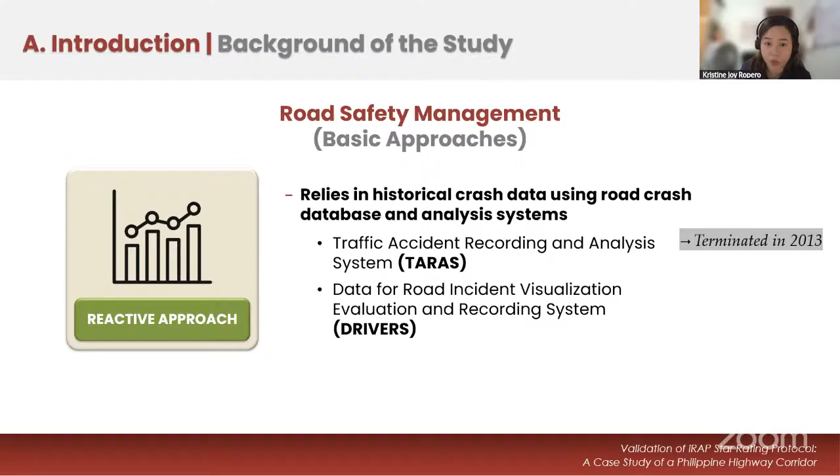Another software or innovation was introduced: the Data for Road Incident Visualization, Evaluation, and Recording System, or DRIVERS. This one was developed by the DOTR together with the World Bank. However, it is not yet operational due to lack of funding. So the problem is that there is currently no operational crash data system being used in the country.

Another approach is the proactive approach, which relies on or focuses on road infrastructure attributes to predict and prevent crashes. An example of this is the International Road Assessment Program, or IRAP. IRAP is a global nonprofit organization which aims to reduce road trauma by conducting road safety assessments and improving road infrastructure. Basically, IRAP uses design features to predict the likelihood and severity of crashes or injuries, and it assigns star ratings from 1 to 5, with 5 being the safest roads.

To understand the concept of star ratings, we can compare it with hotel star ratings. For example, a 5-star hotel rating indicates a higher level of quality of service, such as more luxurious accommodations, larger rooms, and a higher standard of hospitality. Similarly, for IRAP star ratings, the higher the star rating means a safer road and therefore lower crash risks.

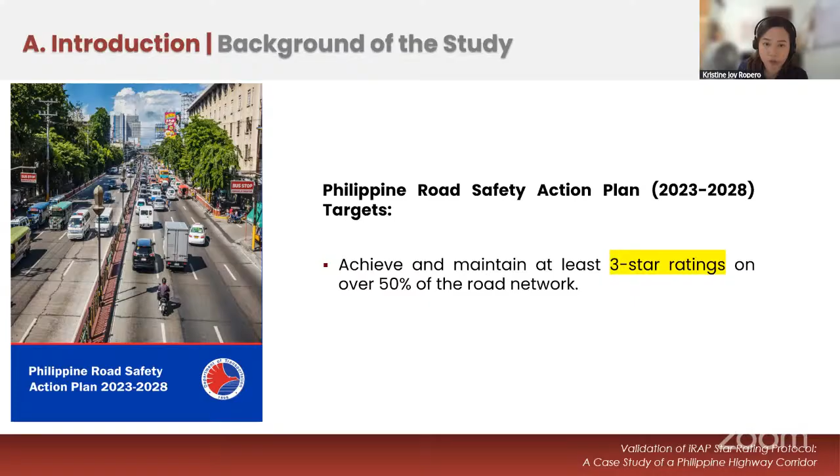Under the Philippine Road Safety Action Plan for 2023 to 2028, the IRAP star ratings are already in place with the goal of achieving and maintaining 3-star ratings on over 50% of the total road network. Now, since we are adopting an international standard, it is valid to ask how well the star rating correlates to actual safety outcomes.

The objective of the study is to demonstrate the validity of the IRAP star rating concept for application in Philippine national roads by comparing star ratings with actual crash data. The star ratings in this study will focus only on the vehicle occupant star ratings.

For the crash data, we will be using the PNP blotter system. But this system, although it contains crash data, is in spreadsheet form, containing information regarding the time, date, location, longitude, and so on. Information about the crash is located in narrative format, so in the e-blotter, everything that happened in the crash is narrated, and from there you can see the crash type and the vehicles involved.

So the study area focuses on the Cagayan de Oro-Davao-General Santos Highway with a total length of 428.20 kilometers.

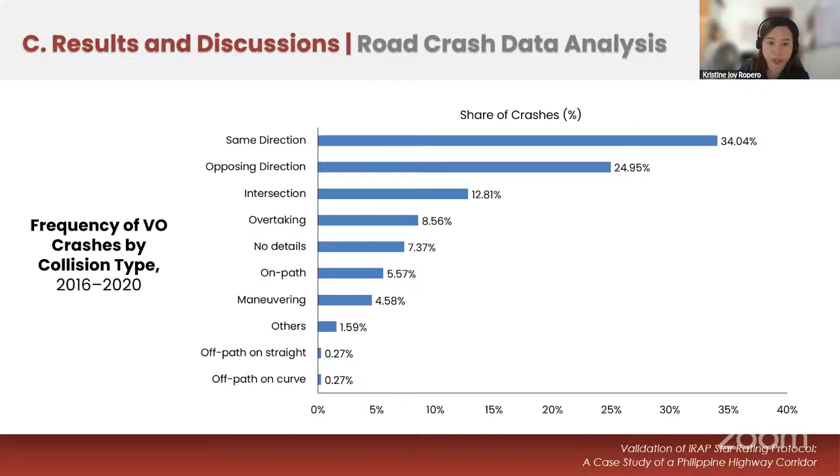And then I used the negative binomial generalized linear model to evaluate the statistical significance of significant changes in crash rates, particularly comparing the 2-star versus the 1-star and the 3-star versus the 1-star road segments.

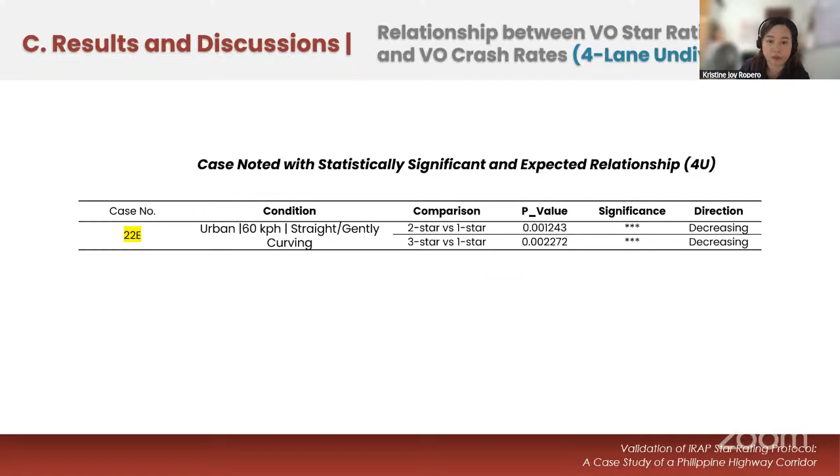So if you'll observe, the IRAP model assumption is that overtaking only happens on the same lane, same direction, but is lessened when it comes to multi-lane roads.

Here in our local driving behavior in the Philippines, and if you recall the slides I showed regarding our dominant crash types, we have overtaking and opposing direction crashes present. So therefore, our local driving behavior differs from the IRAP model assumption.

And then to verify this claim, I utilized the IRAP demonstration tool to check the same road section, the same configuration, 4 lanes, but comparing segments without a median versus segments with a physical median.

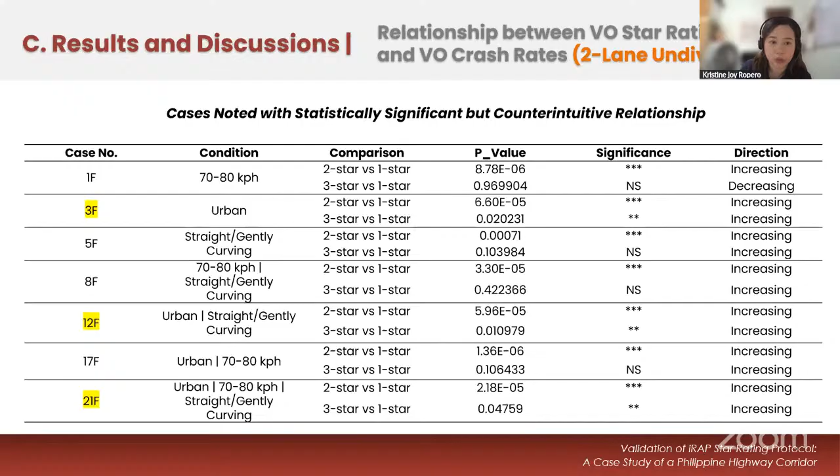And then upon testing the statistical significance, we still identified some counterintuitive cases, but fewer; however, we identified more cases following the expected relationship, which is the decreasing trend.

It is also important to note that when we break it down by speed, we again see a stronger alignment of star ratings and crash outcomes on 2-lane undivided roads, particularly for road segments with lower speed limits, at 60 kph.

So for the overall applicability of IRAP star ratings, although we noted contradictory results in the data analysis, the study identifies opportunities for improvement and therefore does not diminish the value of the IRAP star rating methodology.

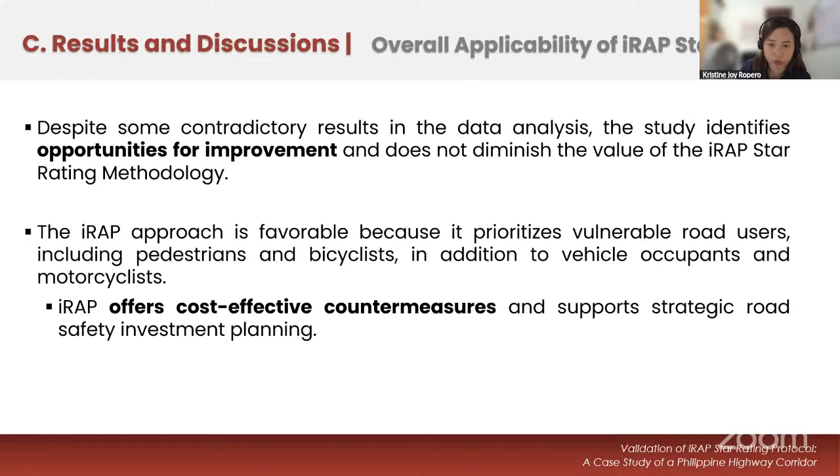We still recognize that the IRAP approach is still favorable, especially for countries like us that don't have a crash database system. So IRAP offers cost-effective measures. That's what's great about IRAP—it has cost-effective countermeasures and supports strategic road safety investment planning.

For the recommendation of this study, star ratings on 4 lanes should be interpreted with caution and supplemented with additional safety analysis, and explore the development of a specific Philippine road safety assessment and integrated safety assessment approach.

Star rating assessment should complement, not replace, crash-based analysis. The combination of the two, proactive and reactive, can help us have a comprehensive understanding of road safety risks.

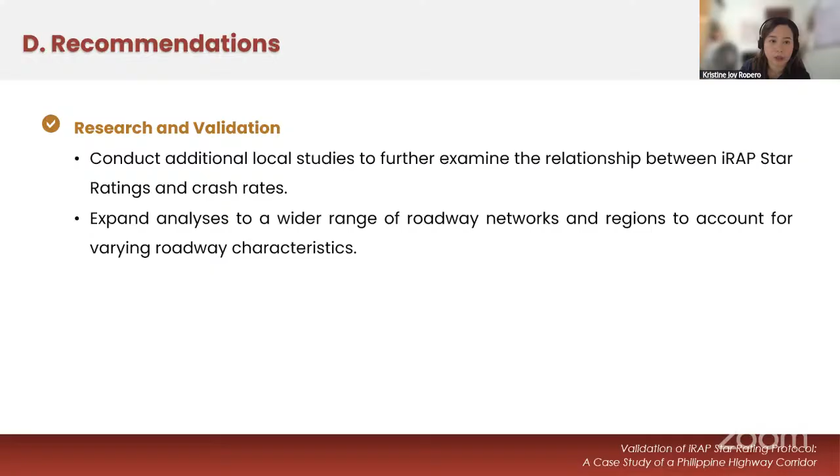Also, additional local studies should be conducted, because it can vary depending on the area. If there are further studies, it would be better so we can really see the relationship between IRAP star ratings and crash rates. These are the references used in the study.

So that ends my presentation.

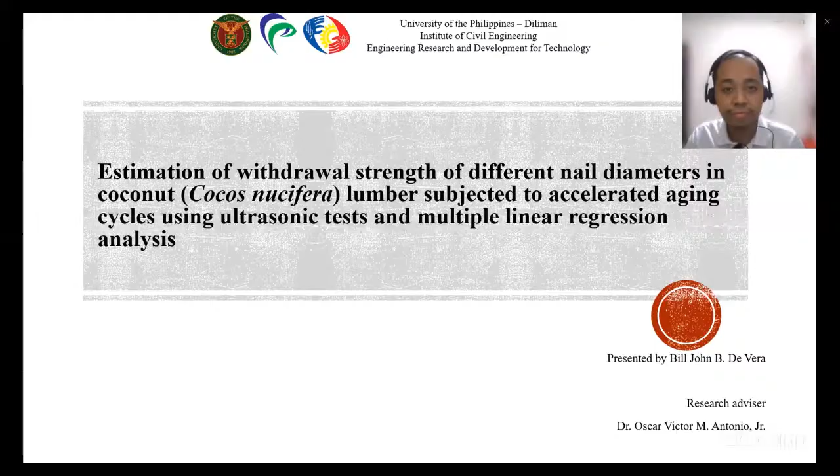To give everyone context for my study, people often live in non-engineered structures outside urban areas. These structures have little to no engineering intervention and are more vulnerable to natural hazards such as typhoons. In 2013, Typhoon Haiyan caused damage to several structures in the Philippines, and roof failure is the most common failure mode. For example, on hip roofs, pull-out or withdrawal failure is a typical failure mode.

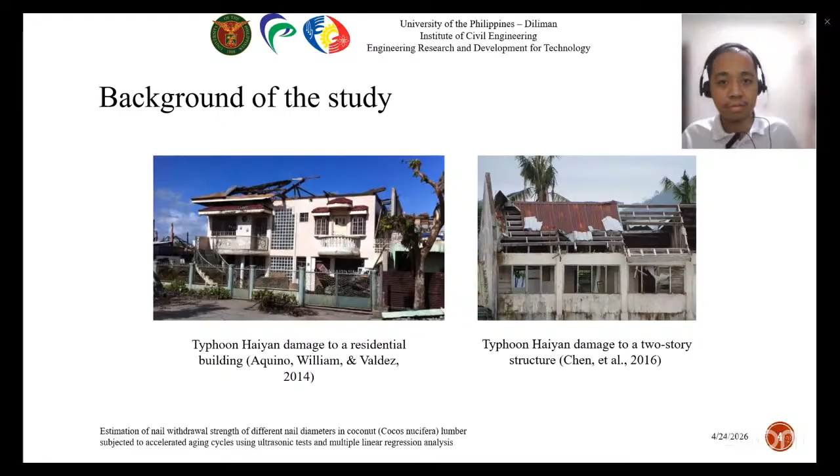Previous studies investigated the influence of different factors such as nail diameter, cracks, and rust on nail withdrawal strength in wood. However, these destructive tests damage the specimens and cannot be used once testing is performed. To date, there is also no study for estimation of nail withdrawal strength of different nail diameters in wood using ultrasonic tests, a non-destructive test.

To address this gap, this study primarily aims to develop an empirical model, that is, a regression model, for estimating nail withdrawal strength in coconut lumber with different nail diameters and ultrasonic test parameters, while accounting for the effects of accelerated aging.

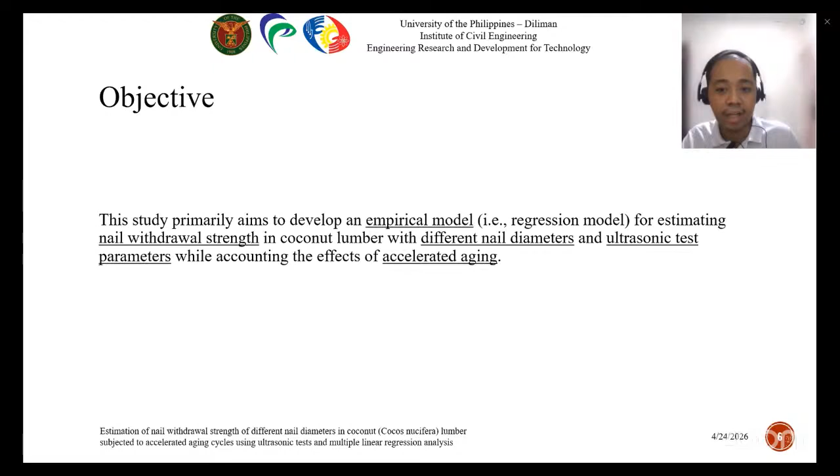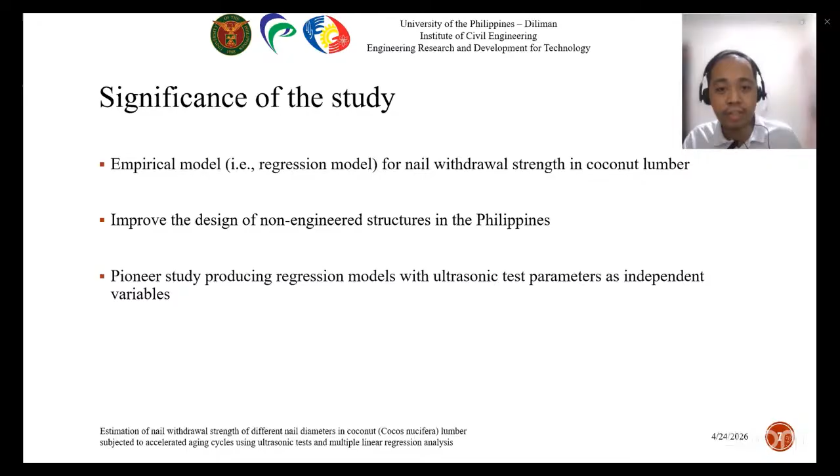If successful, the study will provide an empirical model for nail withdrawal strength in coconut lumber and improve the design of non-engineered structures in the Philippines. This study will also serve as a pioneer study producing regression models with ultrasonic test parameters as independent variables.

To achieve this, the study started from preparing the necessary wood and nail samples for experiment implementation. The prepared samples were subjected to different numbers of accelerated aging cycles. Ultrasonic and withdrawal tests were then implemented. The effects of different numbers of accelerated aging cycles on wood and nail samples were assessed. Finally, statistical and regression analyses were performed to determine the relationship between nail diameter, number of accelerated aging cycles, ultrasonic test parameters, wood density, and nail withdrawal strength.

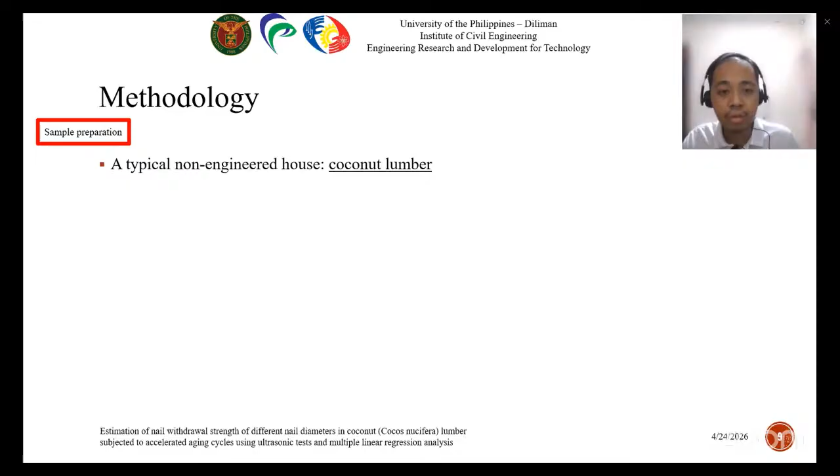A typical non-engineered house roof frame in areas affected by Typhoon Haiyan is made of coconut lumber. Coconut lumbers free of defects with approximately constant grain orientation were selected, and 30 mm by 40 mm by 150 mm wood samples were cut.

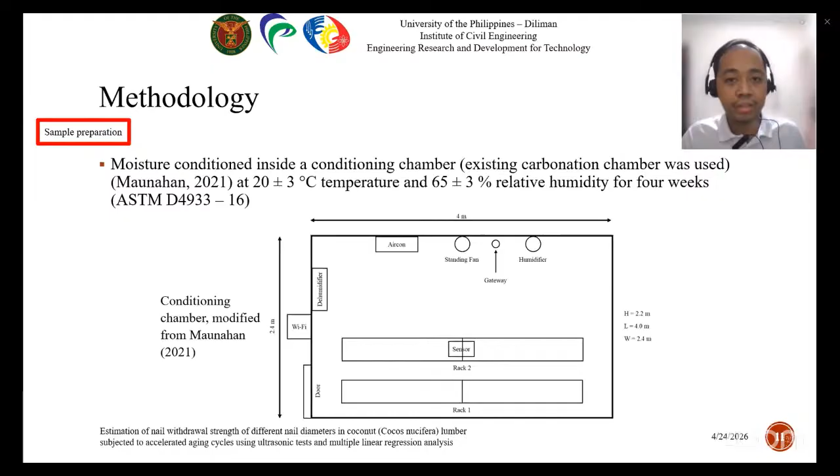To ensure consistency, the wood samples were moisture conditioned inside a conditioning chamber at 20 ± 3 degrees centigrade temperature and 65 ± 3% relative humidity for 4 weeks. These figures show the moisture conditioning of the samples.

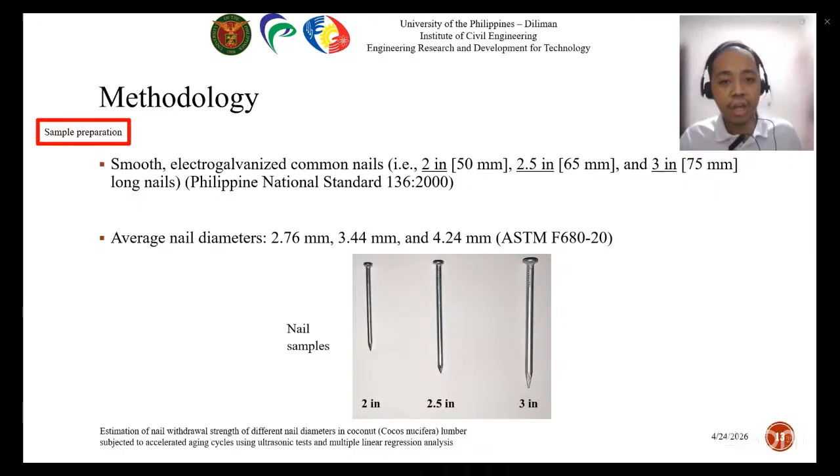3 types of smooth, electrogalvanized common nails, that is 2-inch or 50 mm, 2.5-inch or 65 mm, and 3-inch or 75 mm long nails, were used in this study. The average nail diameters were 2.76 mm, 3.44 mm, and 4.24 mm for 2-inch, 2.5-inch, and 3-inch long nails respectively.

Each nail was hammered at a right angle into the center of the 30 mm by 150 mm face of a wood sample. The nail was marked and embedded 40 mm into the wood sample. Wood samples that exhibited splitting were discarded.

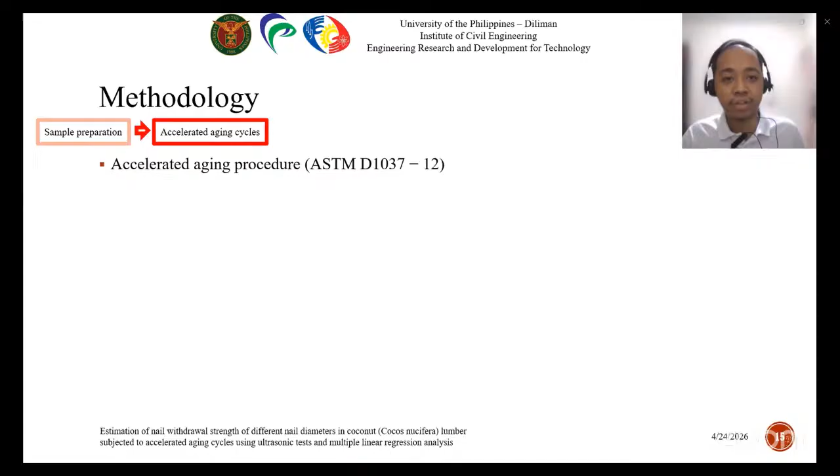Since it was not feasible to perform years of outdoor aging, an accelerated aging procedure was implemented to simulate environmental degradation effects on the samples. The procedure involves alternating steps of soaking, steaming, and oven drying.

To examine damage progression, 5 samples for each of the 3 nail diameters considered were exposed to 0 (control group), 1, 2, 4, and 6 accelerated aging cycles, resulting in a total of 75 samples.

Hereafter, for ease of reference, samples hammered with 2-inch, 2.5-inch, or 3-inch long nails are represented as nail groups N2, N2.5, or N3 respectively. Samples exposed to 0, 1, 2, 4, or 6 accelerated aging cycles are represented as cycle groups A0 (control group), A1, A2, A4, or A6 respectively. Samples hammered with a particular nail size and exposed to a particular number of accelerated aging cycles are represented by a combination of corresponding notations, that is, nail-cycle group. For instance, N2.5A2 represents samples hammered with 2.5-inch long nails and exposed to 2 accelerated aging cycles.

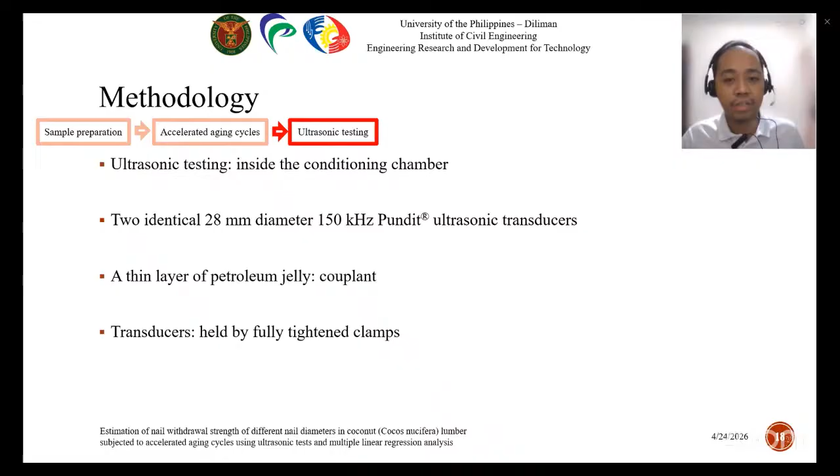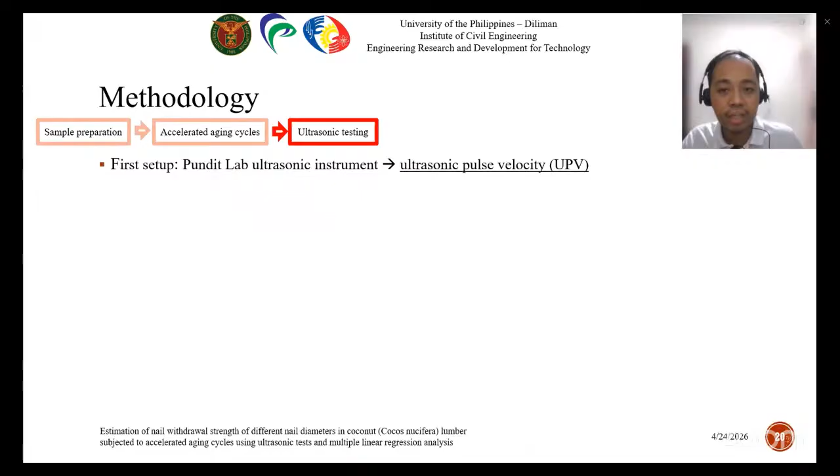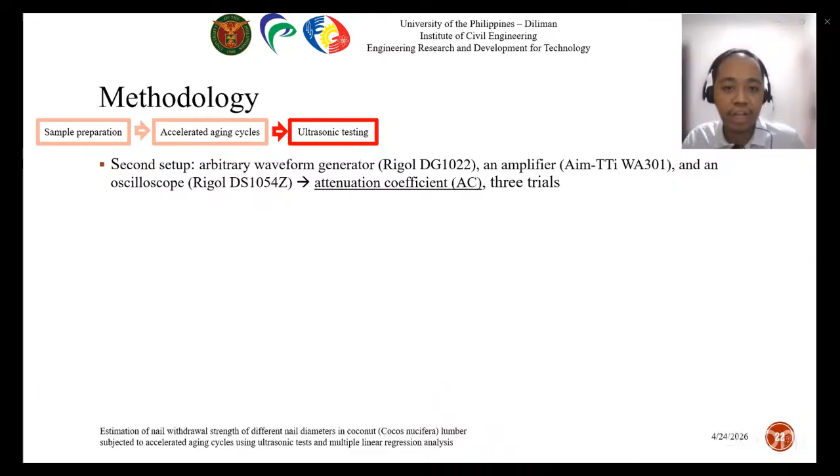Withdrawal testing was then conducted. Nails were withdrawn using an Instron 3366 universal testing machine. A small cross-sectional wood sample, 30 mm by 40 mm by 25 mm, near the nail location was cut from the original sample. The density at the particular moisture content, that is the actual wood density, the moisture content, and the oven-dry specific gravity of the small sample were determined.

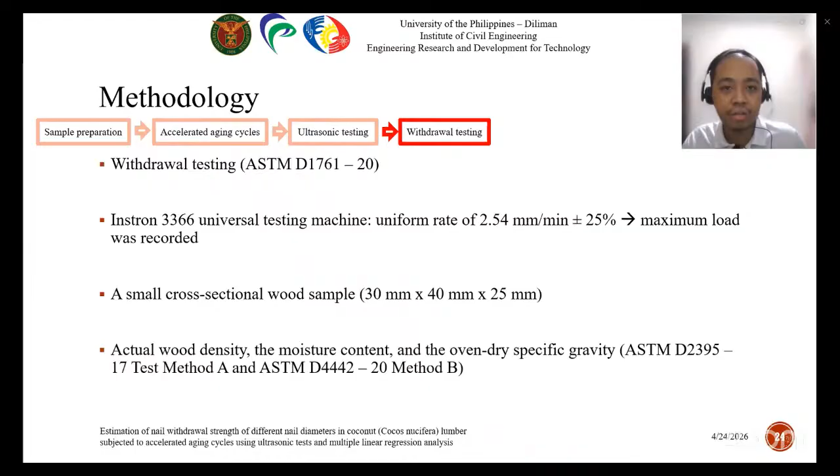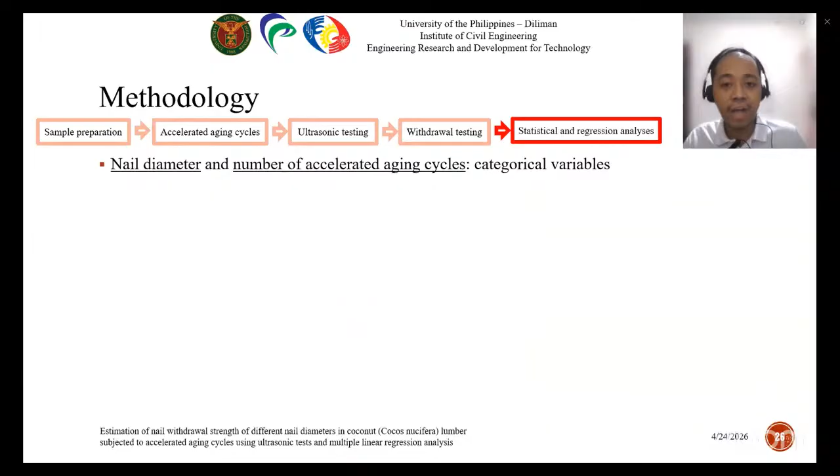The final input variables considered in the study are AC, UPV, 1 over rho cube, N2.5, N3, A1, A2, A4, A6, N2.5A1, N2.5A2, N2.5A4, N2.5A6, N3A1, N3A2, N3A4, and N3A6, where AC, UPV, and rho are attenuation coefficient, ultrasonic pulse velocity, and wood density respectively. On the other hand, the final output variable in the study is LNWS, or natural logarithm of withdrawal strength.

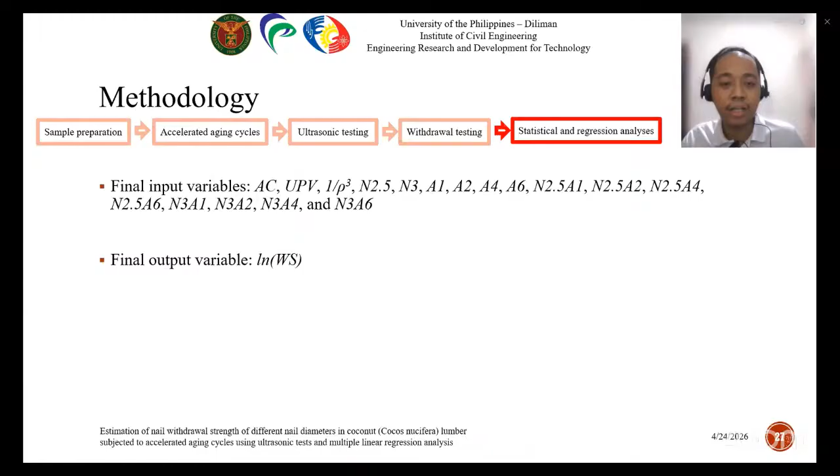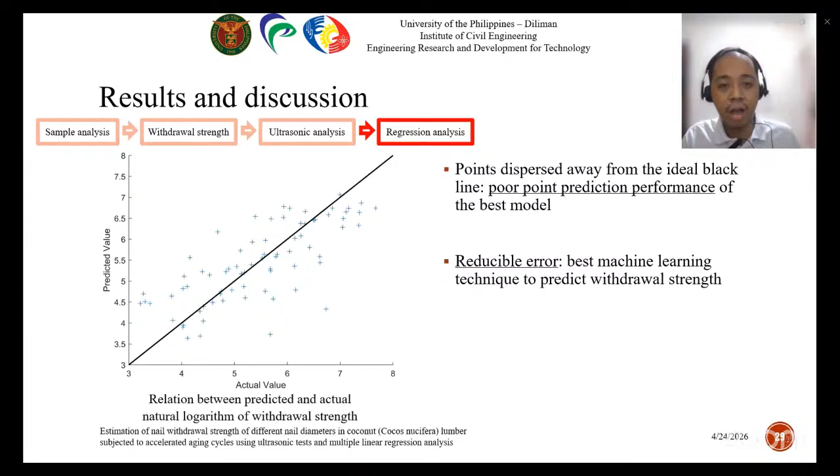Errors can be reduced by using the best machine learning technique to predict withdrawal strength. However, more flexible and complex machine learning techniques such as bagging, boosting, support vector machines with nonlinear kernels, and neural networks typically require larger and impractical sample sizes.

On the other hand, random errors will still exist and are irreducible. These can be attributed to factors that are either unmeasured or inherently unmeasurable, such as nail surface and moisture content variations that can influence withdrawal strength.

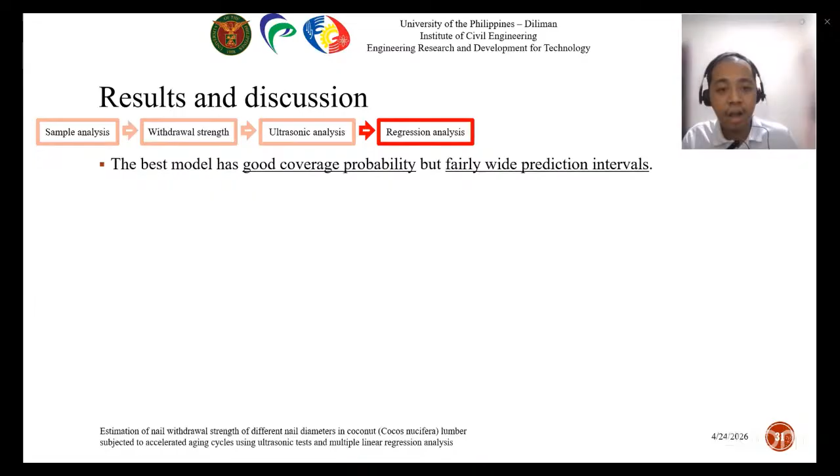With the inclusion of prediction intervals, the best model achieved a coverage probability of 95.6% and prediction interval length of 104.61%. This indicates that the best model has good coverage probability but fairly wide prediction intervals. This captures variability such as due to environmental conditions and coconut lumber water uptake in future observations of nail withdrawal strength.

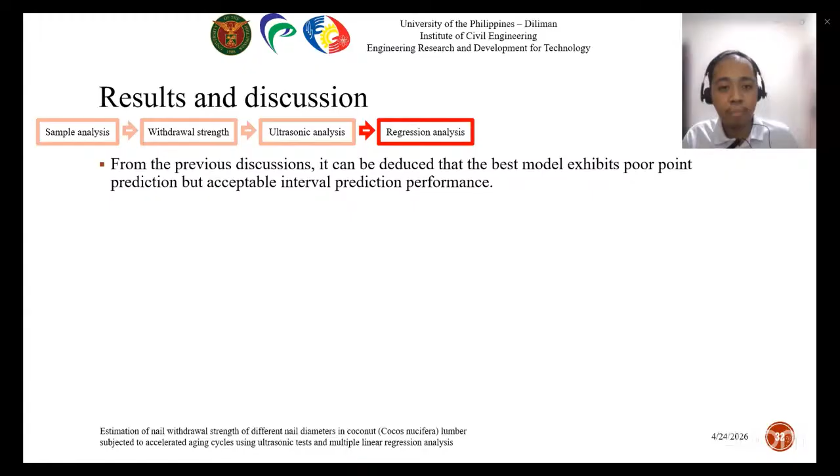From the previous discussions, it can be deduced that the best model exhibits poor point prediction but acceptable interval prediction performance. Prediction intervals depend on the residual mean square, or RMS, and the t multiplier.

Meanwhile, RMS depends on the adequacy of the best model to be an unbiased estimator of the population error variance. During the development of the regression model, the best model satisfies the model assumptions and therefore is adequate. Moreover, the t multiplier depends on the assumption that the prediction errors are normally distributed.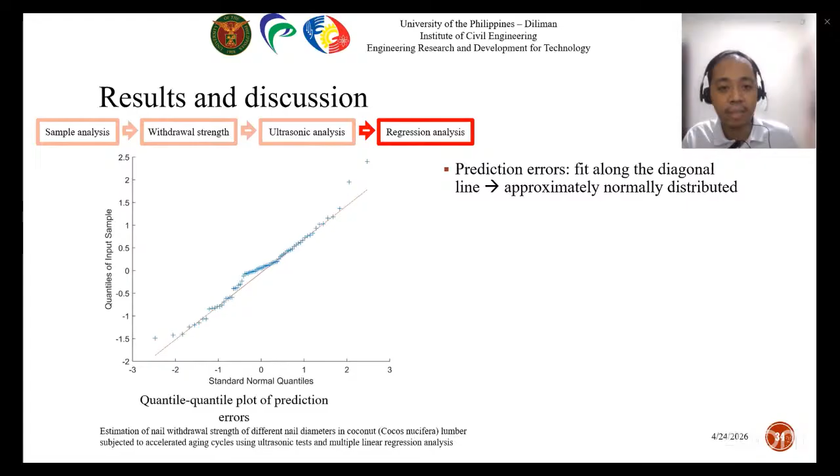The plot shows that the prediction errors fit along the diagonal line, implying that the errors are approximately normally distributed. This all leads to the best model having an acceptable interval prediction performance.

Now the figure compares the lower prediction bound coverage probability of the best model to structural codes such as National Structural Code of the Philippines 2015, or NSCP 2015, and National Design Specification for Wood Construction 2024, or NDS 2024.

The figure indicates that the lower limits of the 95% and 99% prediction intervals of the best model only have 1 and no points below the limits respectively. Overall, the best model achieved a lower prediction bound coverage probability of 98.4%.

However, NSCP 2015 and NDS 2024 have several points below them and only achieve a coverage probability of 69.33% and 65.33% respectively. In other words, both structural codes overpredict withdrawal strength at several instances.

This may lead to potential failure of roof components under actual loading conditions. This is because these codes mainly consider structural wood rather than non-structural wood such as coconut lumber.

The lower prediction bound of the developed model, that is, the best model in this study, may supplement these structural codes and be used to conservatively estimate withdrawal strength of coconut lumber in non-engineered structures in the Philippines.

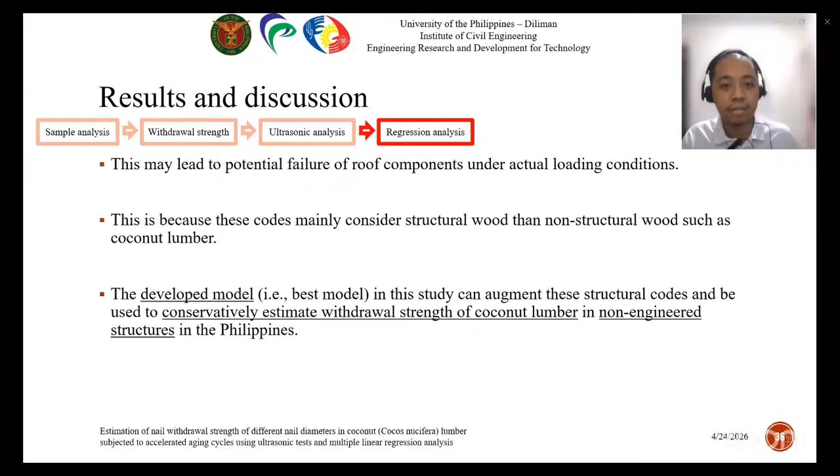The results of this study can be used to perform structural health monitoring of non-engineered structures, detect early damage, and prevent catastrophic failure. The developed empirical model can also provide a conservative estimate of withdrawal strength without destroying the material itself.

The estimated withdrawal strength can supplement existing structural codes which currently do not account for non-structural wood such as coconut lumber.

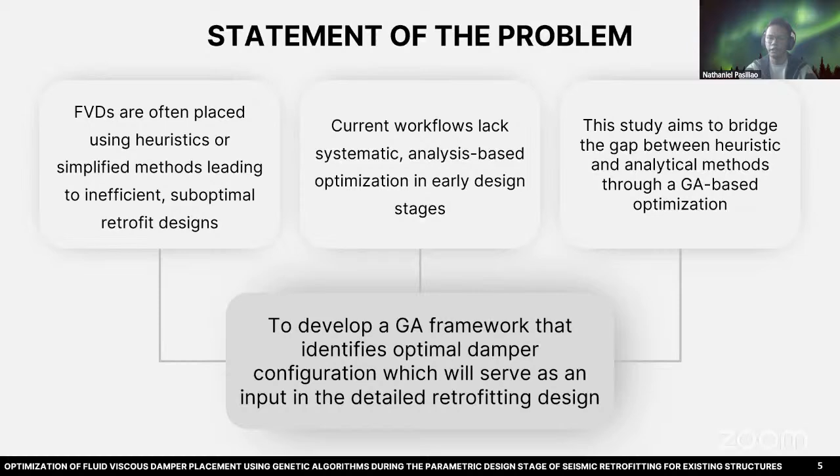The objective of this study is to develop a computational framework to optimize the configuration of FVDs in retrofitting an existing structure. This is achieved through the following specific objectives. Number one is to develop a Python-based code implementing genetic algorithm interfacing with structural analysis software.

Number two is to assess the effect of the different damper configurations on the global seismic performance of the structure. Number three is to determine the optimal damper configuration based on structural parameters. And number four is to provide recommendations to improve damper design methods, highlighting insights on genetic algorithms and automated code integration.

The study develops an automated design workflow, removing subjective trial and error in damper placement and enabling a systematic retrofit approach. The framework is scalable and modular and applicable to both retrofit and new design. This has potential integration into commercial structural analysis platforms as a decision support tool. Lastly, the study contributes to earthquake resilience by enabling optimized damper placement that reduces structural demand, helping minimize economic losses and improve seismic safety.

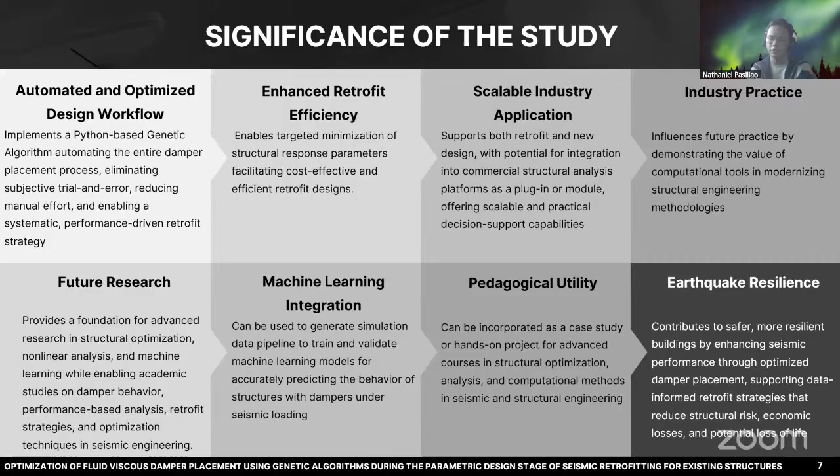The study is applied to an existing 9-story reinforced concrete building consisting of a 2-tower configuration connected through a shared podium. This results in a vertically and plan-wise irregular structure layout due to its asymmetric geometry and an uneven distribution of lateral resisting elements.

The study uses fluid viscous dampers modeled as nonlinear velocity-dependent link elements with the following specifications. A reference relative velocity between connecting nodes of 0.4 meters per second is used to characterize structure response during ground shaking, while a maximum force cap of 2,000 kilonewtons is imposed to represent physical and practical damper limits.

This study is limited to the superstructure and focuses on the schematic, specifically the parametric design stage of seismic retrofitting. A single set of damper properties is used to isolate the effect of damper placement on structural response without introducing additional variability from differing device characteristics. Damper placement is restricted to predefined locations controlled by architectural considerations. This study does not include detailed member-level retrofit design, local effects induced by damper installation, detailed cost estimation, or constructability considerations.

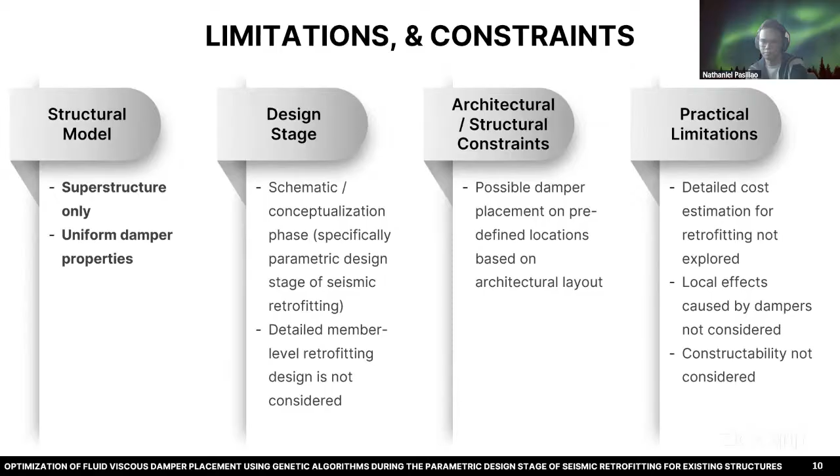The next slides present the relevant concepts and background necessary to contextualize this study.

Fluid viscous dampers, or FVDs, are devices that dissipate seismic energy to control a structure's response to vibration from earthquake, wind, or machinery. They consist of a piston moving within a cylinder filled with viscous fluid, where structural motion causes the piston to move through the fluid, generating a damping force proportional to its velocity. When installed, these devices do not significantly alter the structure's mass and stiffness.

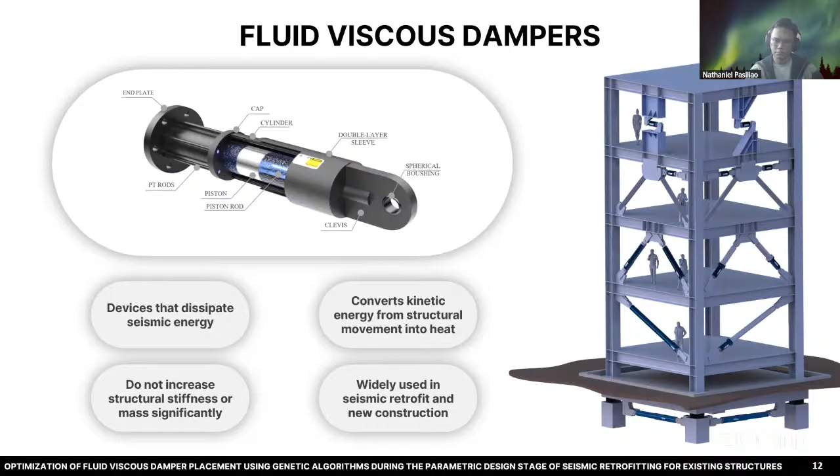To understand how the problem is solved, it is necessary to define how candidate solutions are represented. Each solution corresponds to a specific damper configuration, defined by both the number of dampers and their locations within the structure. This configuration is encoded using a binary string, where each bit represents a feasible damper location, indexed according to its corresponding structural bay. A value of 1 indicates that a damper is installed at that location, while a value of 0 indicates that no damper is assigned to that position in the given solution.

A genetic algorithm is a meta-heuristic optimization method inspired by the principles of natural selection and biological evolution. A GA maintains a population of candidate solutions, each representing a possible answer to the problem, with the goal of evolving better solutions over time through iterative improvement.

Each candidate, often called an individual, is encoded in a structured form, in this case a binary string. These individuals are evaluated using a fitness function, which quantifies how well each solution satisfies the objective. The algorithm then evolves the population over successive generations using 3 main operators.

First is selection, where better performing solutions are chosen as parents, reflecting the idea of survival of the fittest. Second is crossover, where parent solutions are combined to produce an offspring, allowing good traits from the 2 solutions to be inherited. And lastly, mutation, where small random changes are introduced to maintain diversity and explore new regions of the solution space. Reinsertion then determines which individuals from the combined parent and offspring population are retained to form the next generation. Over time, this iterative process drives the population toward higher quality solutions.

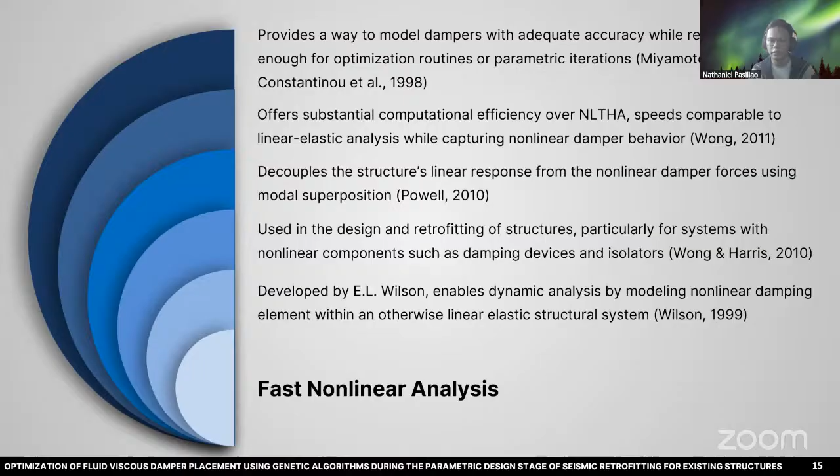Fast nonlinear analysis is a time history-based method that uses ground motion records as seismic input. It models the global structure as primarily linear elastic and restricts nonlinear behavior to localized link elements such as dampers. This approach captures the nonlinear force-velocity response of dampers while maintaining computational efficiency comparable to linear elastic analysis, making it highly suitable for iterative optimization frameworks.

The general workflow of the study is presented as follows. The process begins with the definition of design constraints and analysis parameters. An initial population of candidate solutions is then generated and subjected to seismic loading using ground motion inputs, after which the structural responses are extracted and evaluated through a defined fitness function. The population is subsequently evolved through standard genetic algorithm operators. This iterative process continues until a specified termination criteria is satisfied.

Finally, the optimal damper configuration is identified from the set of evaluated solutions and subjected to engineering judgment for verification and interpretation.

The analysis used 11 pairs of scaled ground motion records as seismic input. Each candidate solution is evaluated using 4 performance metrics: damper quantity, interstory drift, story shear forces, and story accelerations.

The genetic algorithm uses binary coding with a population size of 50 and a maximum of 200 generations. Selection is performed via tournament selection, with uniform crossover at 70% and random bit flip mutation at 5%. Elitism is set at 20%, preserving the best solutions into the next generation, while a random immigrant strategy of 10% introduces new random individuals to each generation to avoid premature convergence.

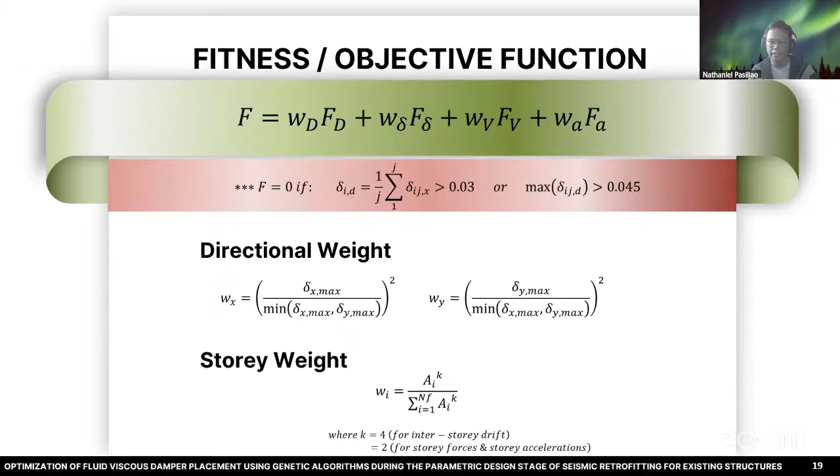In addition, a hard constraint is enforced such that any solution is assigned a fitness value of 0 if the mean interstory drift across all ground motion records exceeds 0.03, or if the maximum interstory drift in any record exceeds 0.045.

GA metrics are monitored to evaluate the efficiency of the algorithm and the effectiveness of its parameters, specifically the population fitness, Hamming distance, and entropy. Hamming distance measures the average dissimilarity between individuals in the population, while entropy quantifies the degree of randomness or diversity in the genetic distribution. These parameters give insight into the convergence behavior of the algorithm.

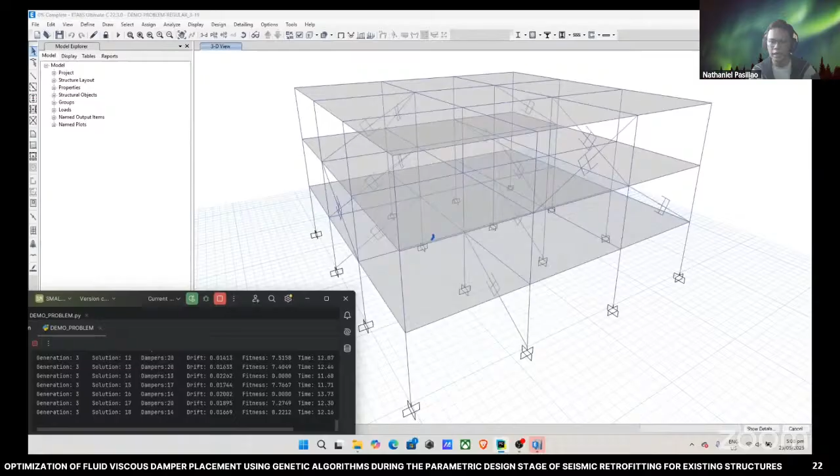Here, we see the fully automated optimization process, where each damper configuration is generated and passed directly to the structural analysis software for evaluation. The model is automatically analyzed under the ground motion records. Responses are extracted, and performance is computed through the fitness function. The genetic algorithm then evolves the population, repeating this loop until a termination criteria is reached.

The first 7 generations showed rapid and continuous improvement, with fitness increasing sharply from 30.35 to 60.41, indicating strong early-stage exploration where the algorithm quickly identifies significantly better configurations. After this phase, improvements became intermittent, suggesting continued exploration with slower convergence, primarily driven by mutation and random immigrant mechanisms.

Early solutions contained up to 41 dampers distributed across both directions, with a concentration in upper stories indicating high initial uncertainty in optimal placement. Over successive generations, the GA progressively eliminated X-direction dampers, reducing the configuration to 16 dampers entirely in the Y direction, and eventually converging to the final optimal solution of 10 Y-direction dampers.

The final optimal configuration was identified at generation 145. Seven dampers are concentrated in upper stories where drift and acceleration demands are highest, with the remaining dampers placed at the 5th and 6th floors, all in the Y direction. This confirms that the X direction did not require additional damping, consistent with baseline response levels.

This configuration produced significant reductions in seismic response. In the Y direction, the peak interstory drift ratio was reduced from an initially excessive value of 0.0358 to 0.0299. In contrast, X direction responses remained close to the baseline with only minor reductions, consistent with the absence of dampers in that direction. Similar trends were observed in story shears and floor accelerations, with clear improvements in the Y direction and near overlapping responses in the X direction, although small reductions were still observed due to torsional coupling.

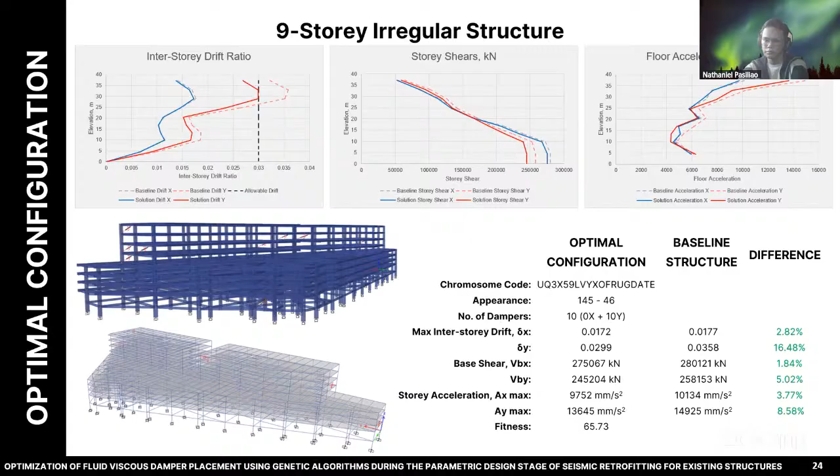The following points are additional insights derived from the results. First, as the optimization progresses, the evolving solutions increasingly reflect the influence of the initial population called founders, which shape the early search direction and affect both diversity and convergence behavior in the solution space.

Second, a properly balanced mutation rate is critical in genetic algorithms, as excessively high values disrupt high-quality solutions, while overly low values may lead to premature convergence and entrapment in local optima. To mitigate this, maintaining population diversity through the introduction of new individuals each generation supports a balanced exploration and exploitation trade-off.

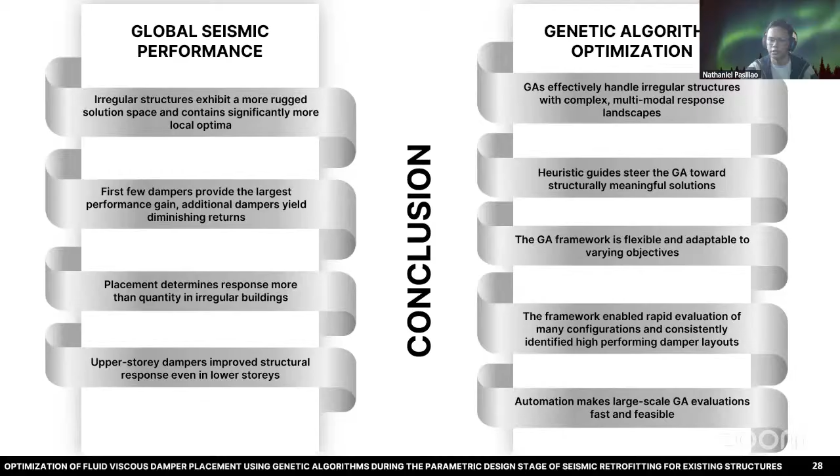The following outlines are recommendations that extend this work toward more robust and practical implementations. For damper design, number one, irregularities should be explicitly accounted for, as they significantly influence response behavior and increase the complexity of optimal damper placement.

Number two, design strategies should focus on optimizing the placement of the first few dampers, as they deliver the most substantial improvements in seismic performance. Number three, damper placement should be concentrated in floors and directions with the highest demand to maximize global response reduction.

Fourth is to use higher fidelity methods such as nonlinear time history analysis to better capture the complex dynamic behavior and validate optimization results.

In the case of GA implementation, several recommendations are also outlined. Number one, incorporating structural insights into the optimization process can guide the search toward more effective and physically meaningful solutions. Number two, optimization algorithms should maintain diversity and exploration to avoid premature convergence and ensure robust identification of near optimal solutions.

Third, incorporating additional performance metrics can provide a more comprehensive evaluation of structural behavior under seismic loading. Fourth, extending the framework to a multi-objective formulation enables explicit evaluation of trade-offs between competing design criteria. And lastly, dynamically adjusting genetic algorithm parameters during the optimization process can improve convergence efficiency and solution quality.

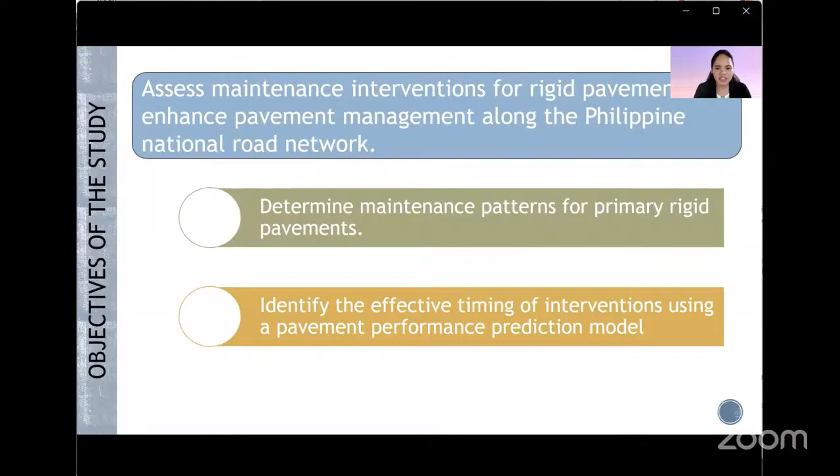Hence, this study seeks to assess maintenance interventions for rigid pavements to support relevant authorities in enhancing the pavement management system along the Philippine National Road Network, by determining maintenance patterns for primary rigid pavements and identifying the effective timing of interventions using a pavement performance prediction model.

These outcomes support key SDGs: SDG 9 through better managed infrastructure, SDG 11 by improving mobility and road safety, and SDG 12 through more efficient use of public resources, ultimately leading to safer and more reliable roads for the public.

This study focuses on primary roads and rigid pavements using a calibrated international model to estimate deterioration and service life in Philippine conditions. Other road and pavement types are excluded for consistency, and results depend on the quality of DPWH data. The Philippine National Road Network spans 35,526 kilometers, including 7,463 kilometers of primary road, with about 62% in concrete. Currently only 35% are in good condition, highlighting the need for effective monitoring and maintenance.

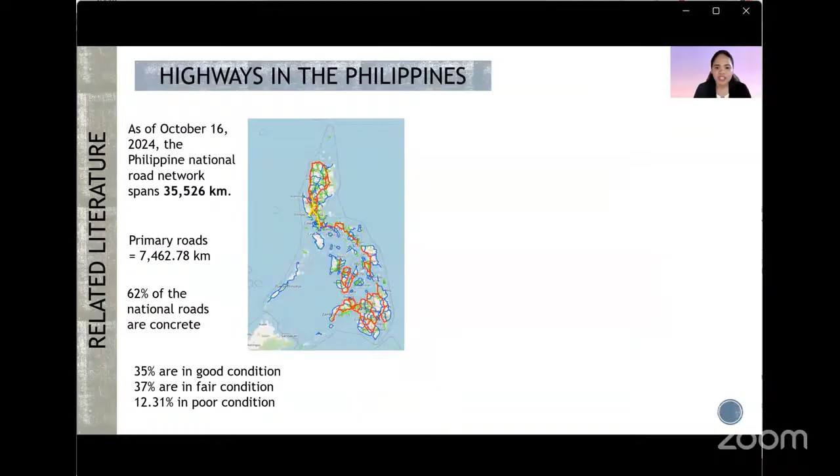In the Philippines, DPWH uses HDM4 with the RBIA database for its pavement management system. However, outdated models, manual condition assessments, and data limitations make management challenging, highlighting the need for updated, locally calibrated pavement models.

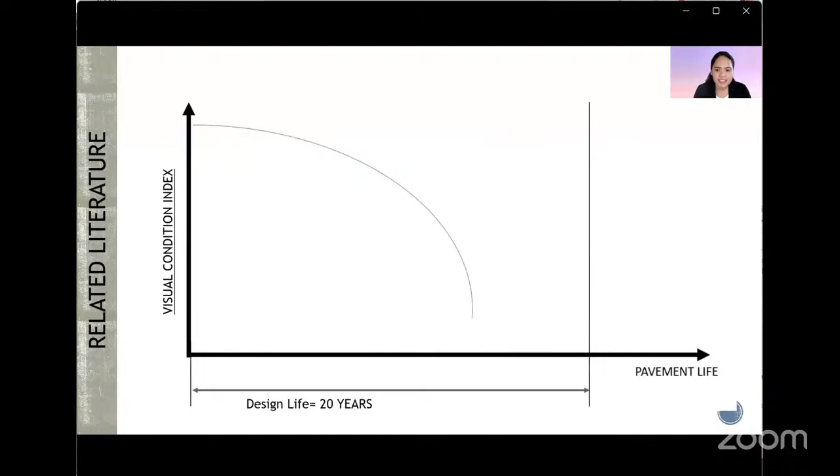Pavement starts in good condition but gradually deteriorates, so DPWH personnel regularly inspect roads and perform routine maintenance to keep them functional. Eventually, pavement deteriorates beyond routine maintenance. Before failure, DPWH applies maintenance to restore condition and extend its service life.

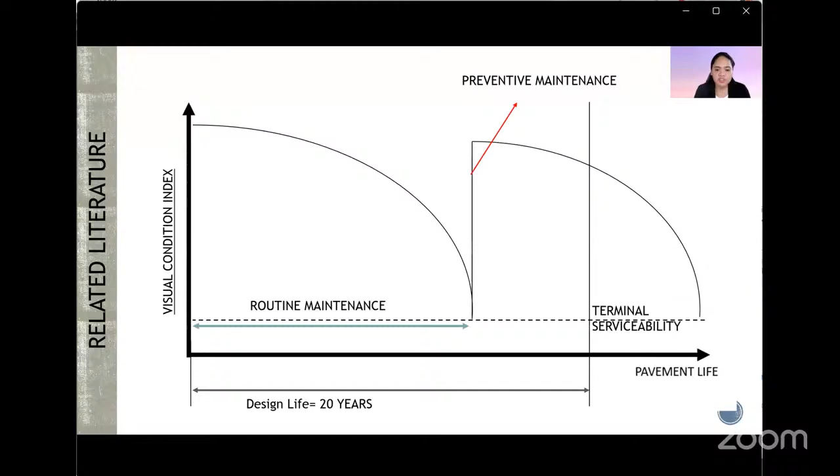Project prioritization is determined using the HDM4 tool, which relies on road condition data gathered through DPWH visual condition assessment. Service life is the time from construction to major rehabilitation, and if not monitored properly, it can lead to early deterioration and higher costs.

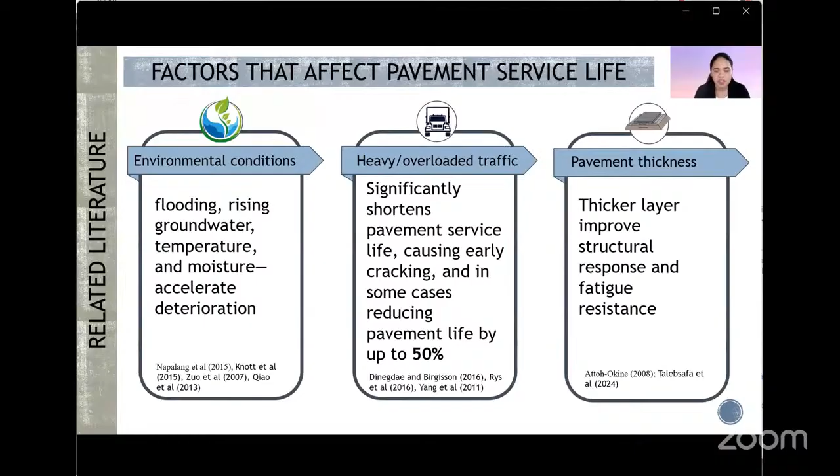Flooding and moisture all accelerate deterioration. Heavy traffic accelerates cracking, and thicker layers improve structural response and fatigue resistance. While many factors exist, this study focuses on traffic loading and pavement thickness, as these most strongly affect deterioration.

Pavement prediction models help forecast deterioration and guide maintenance. They include deterministic models, which are simple but limited; probabilistic models, which capture uncertainty but need quality data; and machine learning models, which are accurate but data-intensive. Each type has strengths and limitations, and the appropriate model depends on availability of data and accuracy needed.

In countries with limited pavement data, deterministic models are often the most practical. In the Philippines, pavement data in DPWH only goes back to 2007 and has quality issues, making deterministic models the most feasible option. Among these, the sigmoidal model captures S-shaped deterioration and improves reliability by reducing rating errors and bias through time shifting.

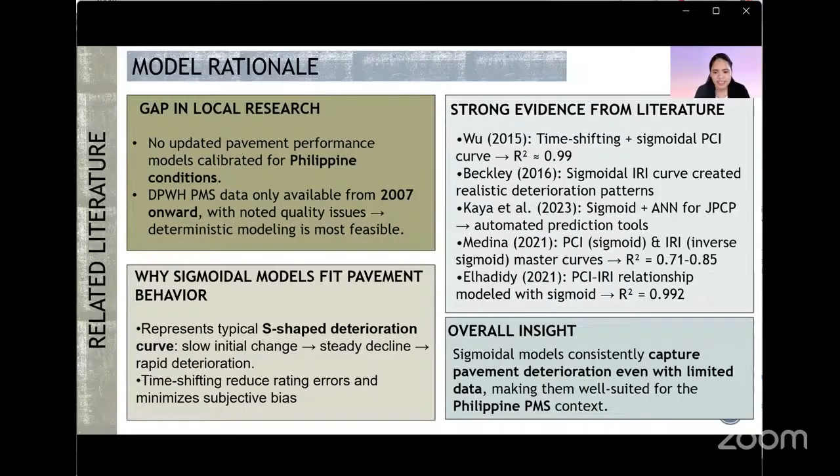International studies strongly support the sigmoidal model. Studies by Wu, Beckley, Kaya, Medina, and Elhadidy report high accuracy with R-squared values up to about 0.99 and realistic pavement deterioration predictions across different models and datasets. Overall, sigmoidal models consistently capture pavement deterioration even with limited data, making them well-suited for the Philippine PMS context.

Road sections were grouped into families based on similar deterioration using traffic loading and slab thickness, classified as light, moderate, or heavy. Data were cleaned for consistency, and although records covered 2007 to 2023, only 2011 to 2023 were used because earlier data showed inconsistencies in section IDs and stationing.

After grouping the sections, VCI trends were reviewed to identify when a pavement underwent maintenance intervention. A reset occurred when the surface changed to asphalt. Average intervention age was then recorded for each family.

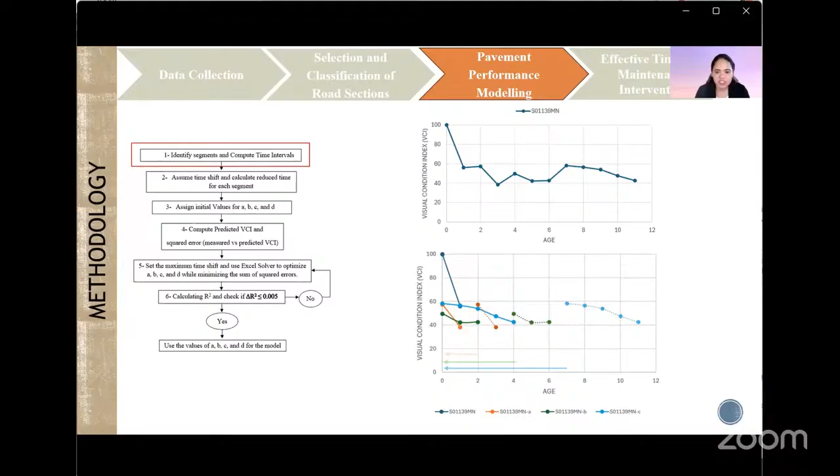Each road section was plotted using VCI versus age. When VCI increased from one year to the next due to routine maintenance, the section was split into new segments starting at age 0. Segments with continuous VCI increases were removed, as they likely reflected subjective ratings rather than real pavement behavior. All segmented data were entered into a spreadsheet.

Each segment was assigned a time shift value, and the reduced years were computed to properly align the segments on the sigmoidal curve. This study uses Wu's sigmoidal model, where VCI is related to reduced time through parameters A, B, C, and D. This describes the deterioration curve with initial values assumed before optimization.

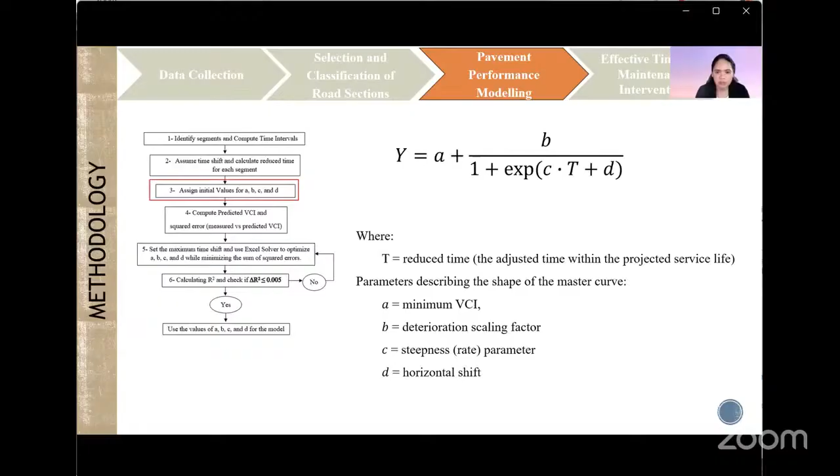Using the assumed parameters, we computed the predicted VCI for each segment and calculated the squared error between measured and predicted values to assess model accuracy.

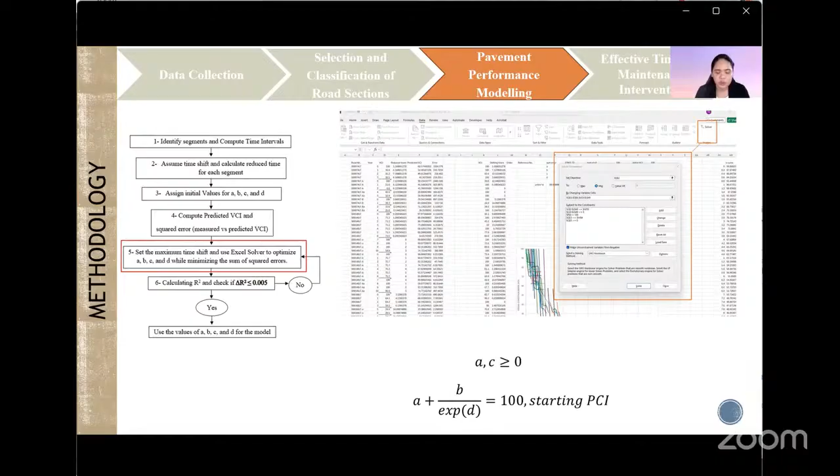We use Excel solver to adjust the sigmoidal parameters and time shift values, minimizing the squared errors to find the best fit. Time shift limits and constraints ensured VCI stayed between 0 and 100, and that the curve started near 100 at age 0. We optimized the model by increasing the time shift in 5-year steps until R-squared changes were below 0.005, improving alignment and achieving the best fit.

So the optimized sigmoidal model was then used to predict when each pavement family would reach the VCI threshold. So these curves were generated based on the calibrated sigmoidal model, representing how pavement condition typically changes over time.

What is immediately noticeable is that instead of showing a long stable period after construction, all families exhibit a steep early drop in VCI. This confirms what earlier studies observed, that early deterioration is common in Philippine pavements due to factors such as material handling, base preparation, and curing quality.

For 230 mm pavements, deterioration depends on traffic. Under light traffic, VCI 70 occurs at 3.7 years and VCI 40 at 9.5 years, aligning with the 8.4-year intervention age, with these sections staying in good condition longer.

For moderate traffic, deterioration is much faster, with the VCI 70 to 40 range occurring between 2.5 and 6.5 years. The average intervention age of 9.87 years exceeds this range, suggesting structural limitations of the 230 mm slab under higher loads. For heavy traffic, deterioration is more gradual, with a VCI 70 to 40 interval of 3.3 to 8.5 years, closely matching the intervention age of 8.57 years.

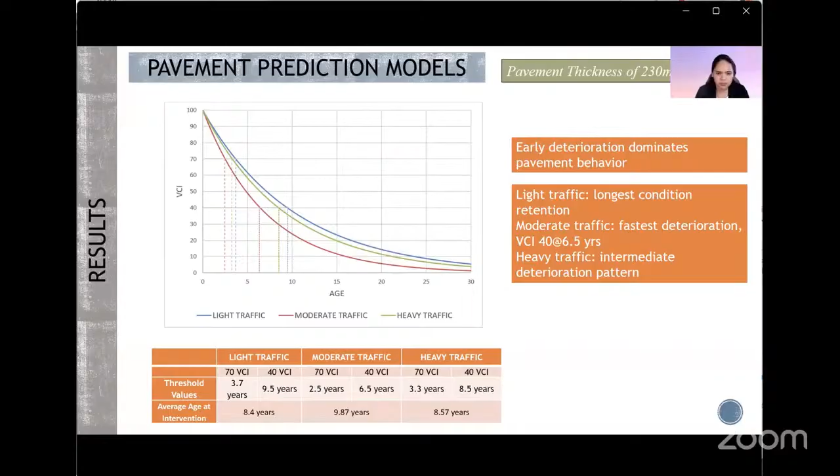For 280 mm pavements, deterioration is generally slower, showing the benefit of increased thickness. Under light traffic, pavements reach VCI 70 at about 8.4 years and VCI 40 at 21.5 years, indicating a long preventive maintenance window. However, the average intervention age of 6.29 years is too early, occurring before maximum benefit is achieved.

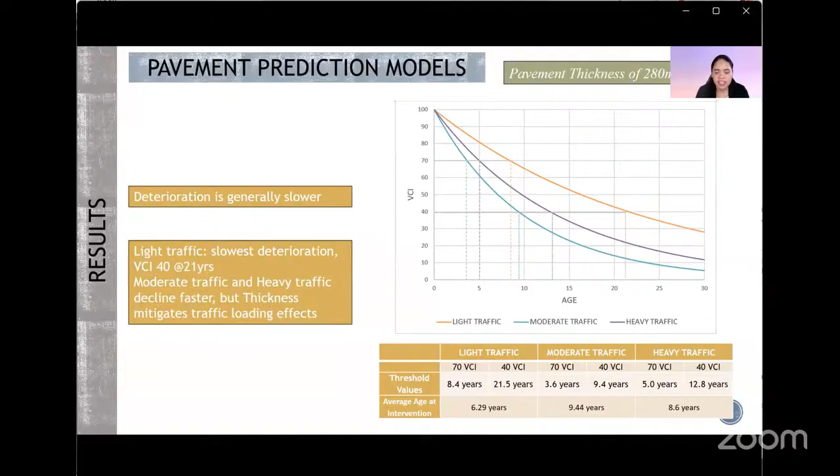For moderate traffic, deterioration is still the fastest among the group, but more gradual than 230 mm pavements. The preventive window is 3.6 to 9.4 years, with interventions at 9.44 years, typically occurring near the upper limit. For heavy traffic, deterioration is stable, with a 5.0 to 12.8 year window, and intervention timing at 8.6 years aligns well with recommendations. The results show that traffic loading alone does not determine pavement performance.

Structural capacity and construction quality also play key roles. Comparing predicted intervention windows with actual practices reveals inconsistencies. In some cases, maintenance is done too early, such as in the 280 mm light traffic pavements, where interventions occur before reaching the optimal VCI 70 to 40 range.

In contrast, 230 mm moderate traffic pavements deteriorate faster, yet interventions are slightly delayed, possibly due to construction issues or overloading. Some sections align well with the VCI 70 to 40 range, indicating more appropriate timing. These findings indicate that maintenance decisions are not always guided by pavement condition or performance trends alone, but may also be influenced by programming constraints, standard project bundling practices, or institutional policies.

Model accuracy was evaluated by comparing measured VCI from DPWH with predicted values, showing strong agreement with R-squared values of about 0.798 to 0.892. Some overprediction occurs at lower VCI levels, but overall bias is minimal. Models with more data points perform better, highlighting the importance of continued data collection for improving reliability.

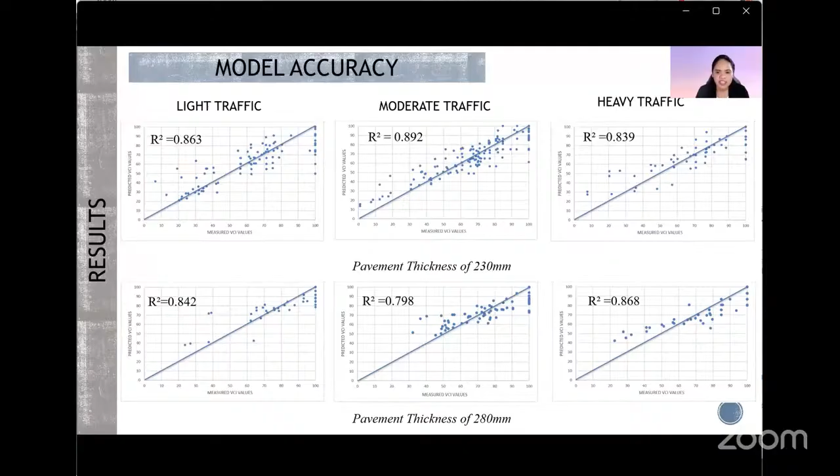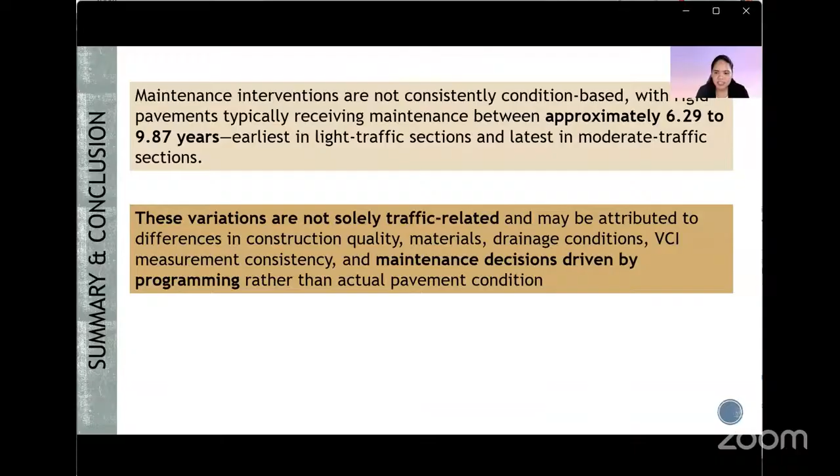In conclusion, maintenance interventions are not consistently condition-based, with rigid pavements typically receiving maintenance between approximately 6.29 to 9.87 years, earliest in light traffic sections and latest in moderate traffic sections. These variations are not solely traffic-related and may be attributed to differences in construction quality, materials, drainage conditions, VCI measurement consistency, and maintenance decisions driven by programming rather than actual pavement condition.

The calibrated models revealed early pavement deterioration with little to no flat portion in the expected S-curve, indicating a need for stronger construction quality control and stricter compliance with specifications to prevent premature pavement failure.

Light traffic 280 mm pavements were treated earlier than recommended, while moderate traffic 230 mm pavements deteriorated the fastest, possibly due to overloading, and were treated later than ideal. However, several pavement families aligned well with the predicted intervention window.

Using the calibrated sigmoidal models, the study identified effective timing of intervention, distinguishing fast from slow deteriorating pavements and enabling properly timed condition-based maintenance. For further study, it is recommended to extend and validate pavement prediction models for secondary, tertiary, and local roads across the Philippine network, include subgrade, environmental, construction quality, and economic factors to enhance model accuracy and support cost-effective planning, and expand model calibration to flexible and composite pavements to enable broader performance forecasting and enhance the DPWH pavement management database.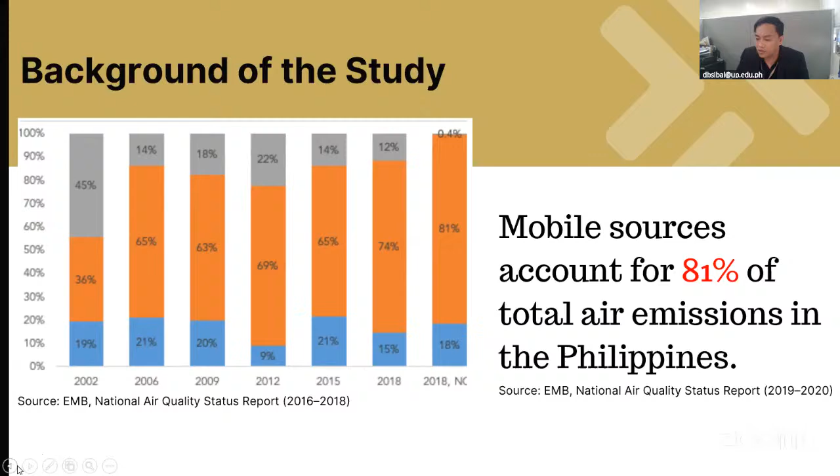The Philippine government introduced the Public Transport Modernization Program, or PTMP, formerly and still commonly referred to as the Public Utility Vehicle Modernization Program, or PUVMP, a project of the Department of Transportation in 2017 which aims to replace old vehicles with cleaner ones. The program aligns with Lee Schipper's ASIF framework by reducing emissions through improved activity efficiency, enhanced mode share, lower energy intensity, and cleaner fuel technologies.

But here's the key question: will this be enough to significantly improve air quality? That's what this study tried to answer.

The goal of this study is simple: to evaluate how different transport modernization strategies affect air quality and health, and more importantly, to identify which strategies actually make a meaningful difference.

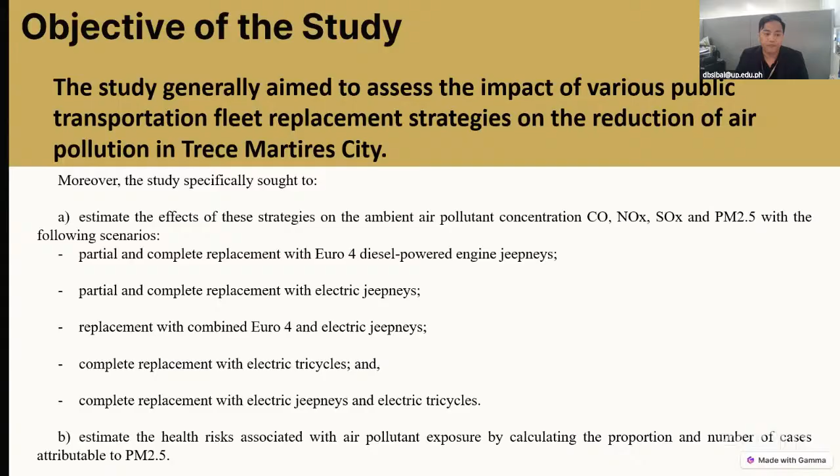The study focuses on a busy intersection in the city. Why here? Because it reflects a typical urban area with increasing traffic. One important finding early on is this: motorcycles and tricycles actually dominate the roads, not jeepneys. This becomes very important in understanding the results later.

To answer the research question, I used a simulation approach. I used a dispersion model to simulate pollutant concentrations, and AirQ+ was then used to estimate the health impacts. In simple terms, I created different what-if scenarios, such as what if we replace jeepneys with modern ones, what if we use electric vehicles, and what if we electrify both jeepneys and tricycles. Then I used a model to estimate how pollution spreads in each scenario.

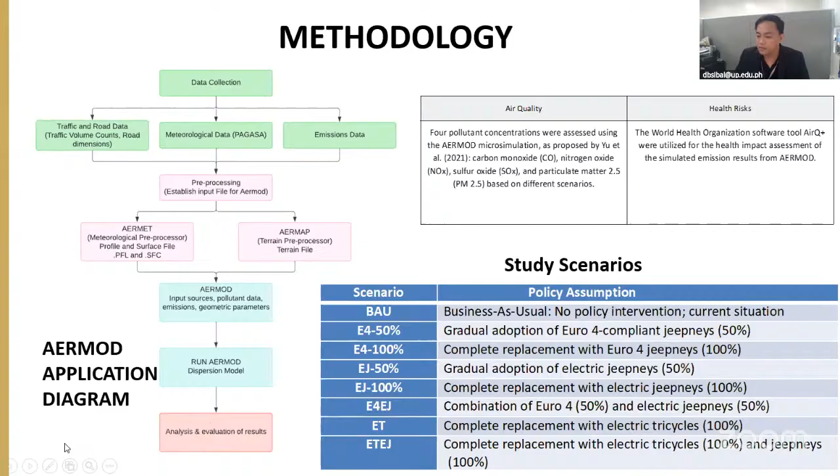To make the model realistic, I collected traffic data—what vehicles are on the road—measurements, and weather data, and these factors affect how pollution behaves in real life.

Before going to the results, there is one important observation: jeepneys are only about 13% of the traffic, and most vehicles are motorcycles and private cars. So even before the results, we already expect that focusing only on jeepneys might not be enough.

After preparing the inputs and estimating vehicular emission rates, spreadsheets were prepared to calculate emission rates, which consider total vehicle count, emission factors, and road width. Emission factors were sourced from the JICA roadmap for transport infrastructure development for Metro Manila and surrounding areas, and vehicle fuel assumptions from the same report were also adapted to ensure consistency in the analysis.

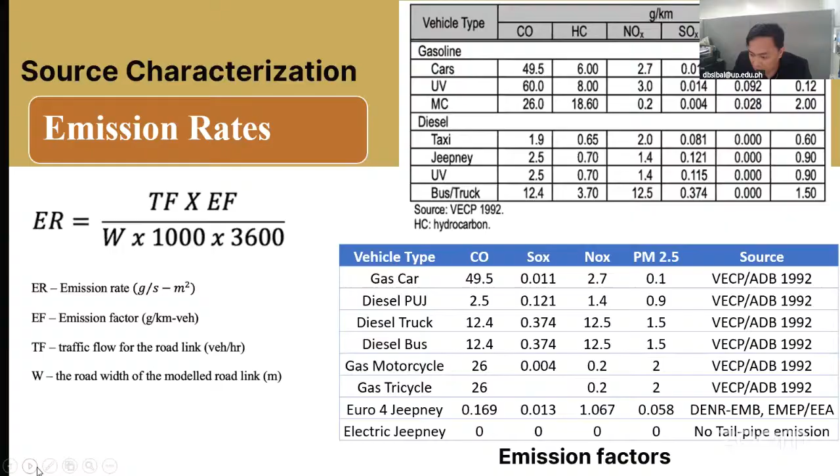In essence, the model estimates how pollutants disperse from traffic under the different scenarios presented earlier. To evaluate the results, pollutant concentrations were compared against WHO and DENR guidelines. Additionally, pollutant levels were converted into AQI values using the US EPA's AQI calculator. Higher AQI values indicate greater pollution and health concerns, as presented by AQI colors.

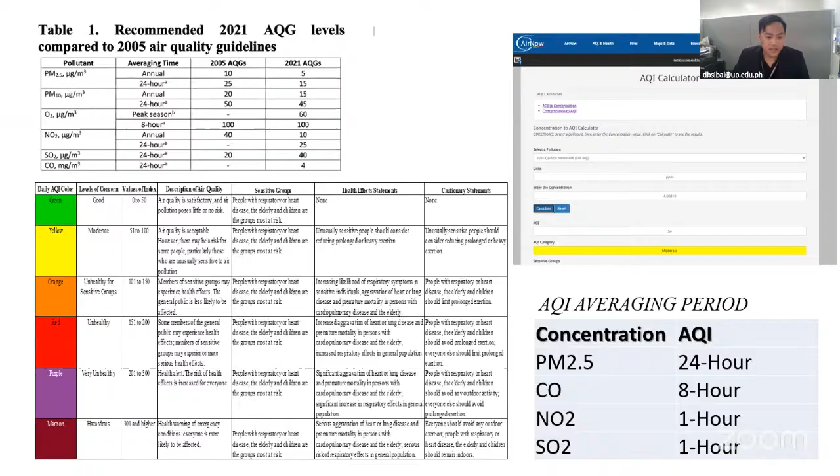Now the results. Starting with carbon monoxide, all scenarios here are within acceptable limits. All scenarios, from the business-as-usual scenario, fall within the moderate AQI category, suggesting minimal health risk, but electrification scenarios involving the full electrification of tricycles and jeepneys showed further reductions. This indicates that carbon monoxide is already controlled, but can still benefit from cleaner technologies.

These contour maps compare the business-as-usual scenario with the electrification scenarios, which demonstrated the most significant reductions in carbon monoxide concentration based on the simulation results. This contour map reveals a noticeable reduction, with CO concentration decreasing from the business-as-usual scenario to the electrification of tricycle and jeepney scenarios.

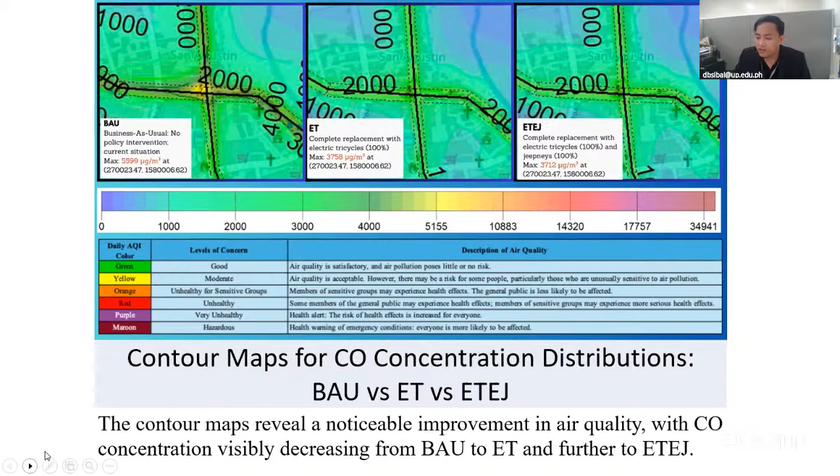And for the next pollutant, which is NO2, or nitrogen dioxide: in contrast, NO2 results showed a different trend. Although there were reductions, all scenarios remained in the unhealthy category. This limited improvement is likely due to the distribution of vehicle types in traffic flow, since NO2 is emitted by both diesel and gasoline vehicles, mainly cars and motorcycles.

These contour maps indicate a visible decrease in NO2 concentration from the business-as-usual scenario to electrification scenarios. Still, results show that all scenarios remain in the red or unhealthy category, suggesting that sources beyond jeepneys, particularly private cars and motorcycles, continue to dominate NO2 emissions.

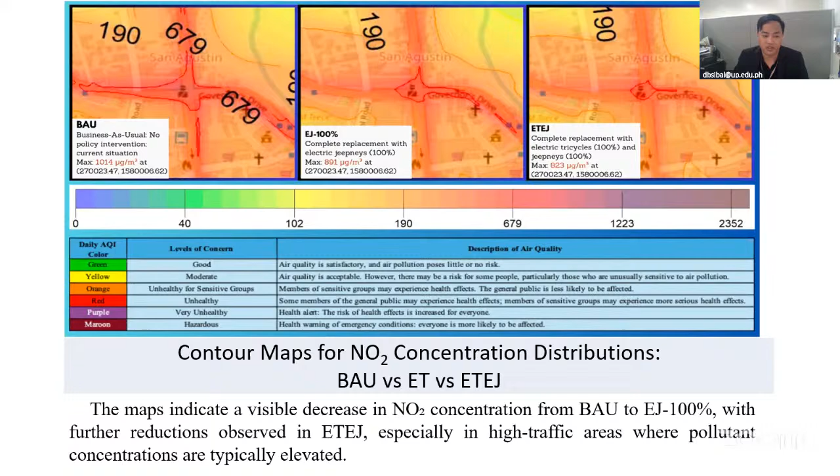For SO2, all scenarios met guideline values, falling within the good AQI category, probably because of the absence of industrial SO2 sources in the model, since the simulation focused exclusively on emissions from the roads, excluding potential contributions from other sources in the area.

Significant reductions were observed, especially in the electrification scenarios. These contour maps show a clear decrease in SO2 levels from the business-as-usual scenario to the electrification scenarios, with further improvements seen in the combined electrification of tricycles and jeepneys. This confirms that diesel-powered vehicles are major contributors to SO2 emissions.

For PM2.5, all scenarios remain in the unhealthy category even with full electrification. Concentrations were reduced by about 46%, but still exceeded guideline values. The results show significant reductions in pollutant concentration across scenarios, confirming that electrification contributes to a decrease in PM2.5 concentrations. However, these results highlight that while electric vehicle replacements reduce PM2.5 levels, they remain above WHO and DENR guidelines due to the contribution of other vehicles like motorcycles and private cars in the area.

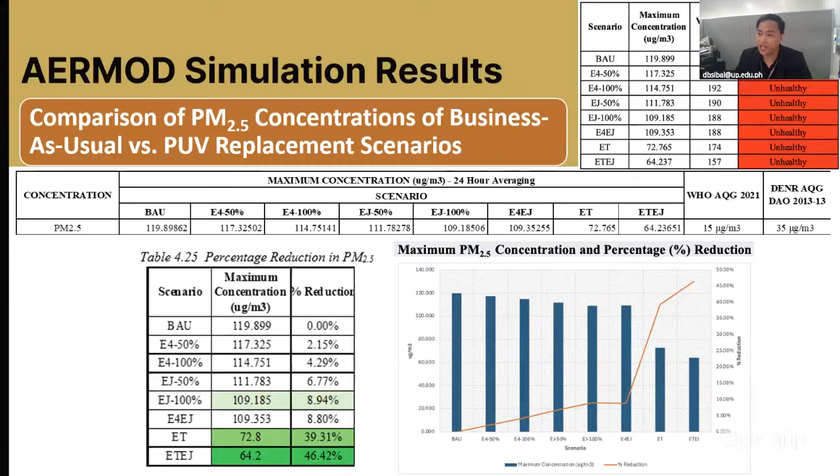At this point, one important question arises: why are improvements still limited despite modernization? The answer lies in the traffic composition. Private vehicles and cars, major contributors, were not fully addressed in the main scenario, so even before the results, we already expected that focusing only on jeepneys might not be enough.

To explore the electrification of private vehicles further, a sensitivity analysis was conducted by simulating additional scenarios that assumed stepwise electrification of private cars. As electrification increases from 20% to 50%, air pollution consistently decreases. At 50%, PM2.5 drops enough to reach moderate air quality, with about a 70% reduction from current conditions. In summary, when private vehicle electrification was included, PM2.5 reductions reached up to 70% and AQI levels improved significantly.

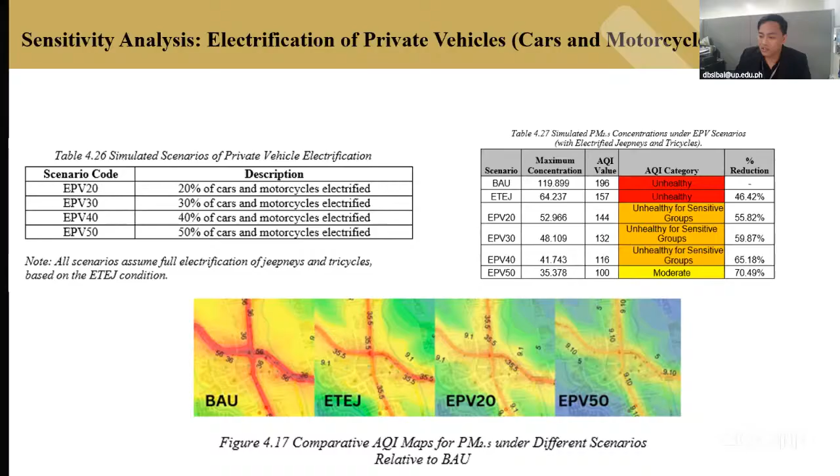Now, to translate these findings into real-world impact, a health assessment was conducted using AirQ+. The health impact of the scenarios was evaluated focusing on three key metrics: the attributable proportion of cases, the estimated number of attributable cases, and cases per 100,000 population.

In conclusion, this study assessed how replacing public transport vehicles with cleaner electric alternatives affects air quality and health in Trece Martires City. Results show that electrifying jeepneys and tricycles significantly reduces air pollutants. We also found that including private vehicles in electrification leads to even greater improvements, with up to 70% reduction in PM2.5 and better air quality levels.

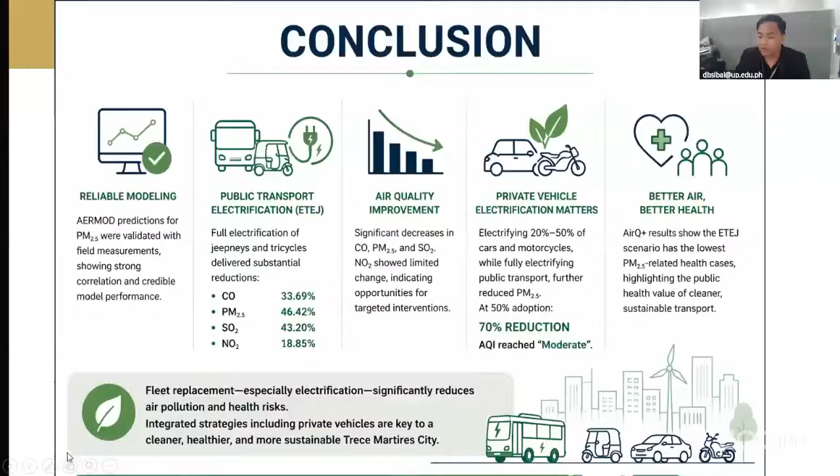So for recommendation, future work should expand the study to more intersections, improve model accuracy through calibration, and include other vehicle types and pollution sources. It is also recommended to assess long-term health impacts and conduct cost-benefit analysis. Overall, this will help improve future transport planning and air quality management.

If other cities or municipalities aim to assess the impact of various fleet replacement strategies on air quality, they can adapt the methodologies used in this study. The approach integrates air dispersion modeling using AERMOD, health impact assessment via AirQ+, and secondary data such as traffic volumes and emission factors. With calibration to fit local conditions, this framework can serve as a guide for evaluating the effects of public transport modernization programs and similar interventions.

And with that, I conclude my presentation. Thank you very much.

Thank you very much, Engineer Sibal, for sharing your presentation that is, I would say, very relevant in the context of the Philippines, considering that we have many challenges in the transportation sector right now and in the ongoing energy crisis. We just have a question here for you, Engineer Sibal. Based on the result of your study, it shows that even with public transport modernization, PM2.5 levels remain unhealthy. So what additional strategies does your research suggest to basically achieve acceptable air quality levels?